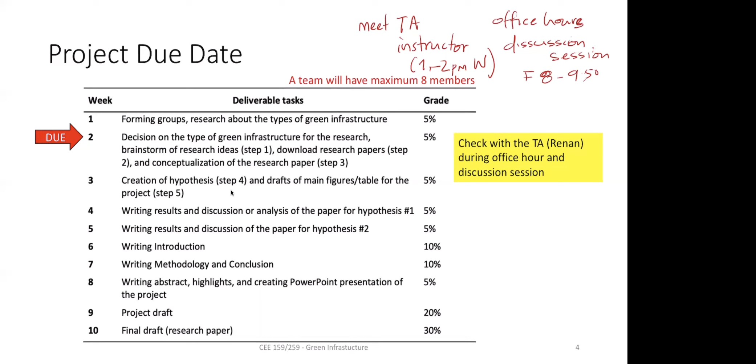So you can join as a group. Again, not all group members have to be there, as long as you have that coordination. You can record during that meeting so that you can also share with your group and go over it. Again, the scope of the project is very much anything you can do really.

So it's not us who will decide it. But if you are thinking of making it a web publication, then we'll help you early on what kind of project you should choose, because we have an idea about what is publishable and what is not. So we will be more involved in selecting the topic for you if it's going for publication.

As far as I know, the one group that initiated initially is already full. That doesn't mean that if you have interest, you cannot do it now. Just let me know, send me an email, because it's still early phase, you are discussing different projects. So by second week, we can form another group. But we just need a minimum few people to create that topic.

Again, the reason for class projects is it will give you real world experience of developing a project, writing a proposal for an agency. So you learn how to work as a team, because alone you have a different style, different people have different styles. You got to work with them together to complete your task. This is good experience. And most importantly, you learn how to write scientific, technical writing skills, and also how to present well. These are things you learn if you took class CE159/164 last quarter.

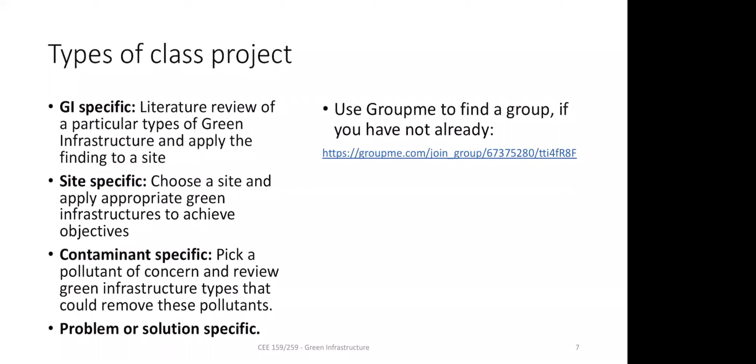You'll learn what those components do — for instance, components like plants, so whether you have plants or not, what kind of soil, what kind of filter media, how much spacing there should be between locations, how much grading or slope it should have — you'll learn at least the concept behind all of these.

Then you'll also learn the scope of the project, which you already covered. Most importantly, at the end you'll learn how to use the mass balance equation to figure out how much water you'll receive at a location, because you're going to treat stormwater — if you don't receive stormwater, you can't treat it. So you have to calculate how much stormwater you'll receive at the site when you design the system. You might also calculate how much pollutant you'll remove through simple reaction processes — these are again mass balance concepts.

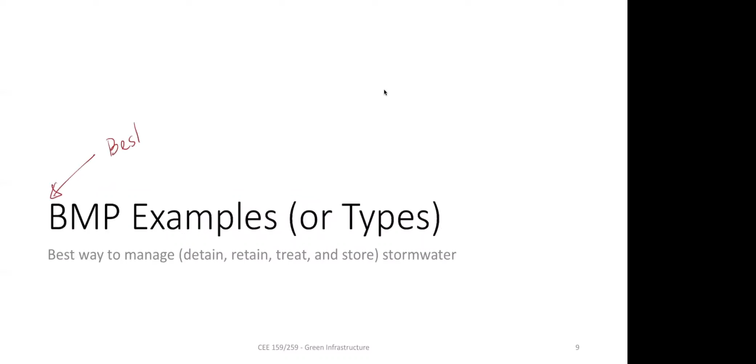The first thing is BMP. This BMP and green infrastructure are very similar concepts. BMP is used for many things, not necessarily just stormwater. BMP stands for best management practice.

Okay, so there is best management practice for how to prevent issues, right? BMP is for many things, it doesn't have to be just stormwater. But in stormwater areas, a lot of people use BMP and green infrastructure interchangeably. Let's say BMP means anything, it doesn't have to be green infrastructure. It could be something like not building in that area - that's the best management practice, you're not building anything. Green infrastructure is something in between. So green infrastructure is a small subset of the entire BMP.

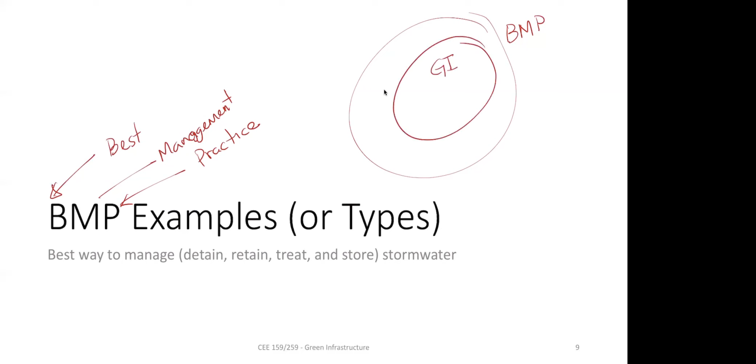That's a... sorry, I don't know why this closes. There's a message coming from somewhere, I don't know how to mute it. Okay, anyway, hope that person doesn't respond. Sorry about that.

I'm sorry, let me tell this person not to text me. There are texts coming everywhere even though my phone is off - it's a computer.

This is again on the green roof. UCLA is a beautiful campus and there are a lot of places you can see green infrastructures. It's unfortunate that we have to do this online right now. There are other things you can see that aren't part of UCLA but are worth noting - rain gardens, rainwater harvesting tanks, and other things like planter boxes and permeable pavements. Again, you should go to this website so you can see all of them.

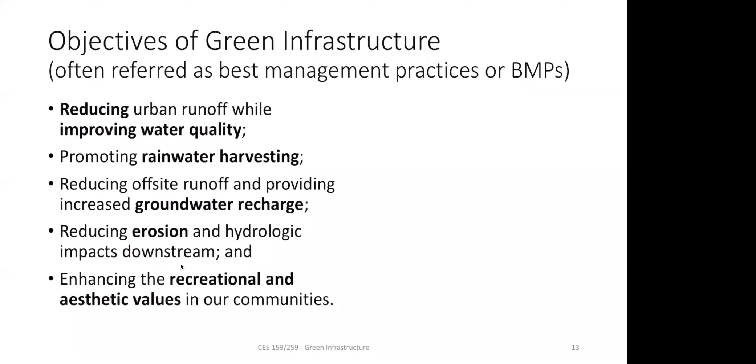One of the questions in the homework was, what's the objective of green infrastructures? There are multiple benefits. It reduces runoff by infiltrating more water, and because it has more infiltration, it increases groundwater recharge. Because it has less runoff, it decreases erosion - more runoff means more velocity, which increases erosion and has negative impacts on the downstream environment. It can also harvest stormwater or rainwater using devices like rainwater harvesting tanks. It also has multiple ecological benefits - not just that it looks like green space, but it helps birds and other microorganisms or biota survive. Those are part of ecosystems that are slowly having their diversity decrease in urban areas, and by putting in green infrastructure, we are helping those communities.

So there are many types of BMP. I'll go through them by function so you know how to use it and when to use it. There are green infrastructures designed as pre-treatment - they are not necessarily designed to treat the entire stormwater, but at least to remove some of the large particulates from the stormwater.

One very common type is the screen. Every time you drive or walk on a sidewalk, you might see on the roadside where stormwater or runoff gets into the drainage. Before that drainage, you'll see the screen. The reason for the screen is to prevent leaves from falling in so it doesn't clog. These are pretty big screens, so that's kind of a pre-treatment.

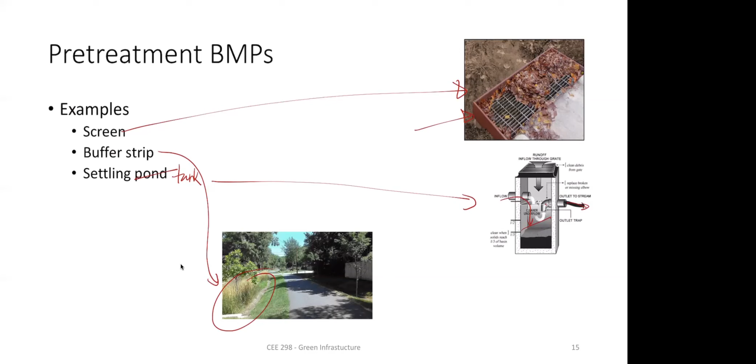So these are very typical pre-treatment strategies for first flush. First flush means the very first amount of runoff you get when it rains.

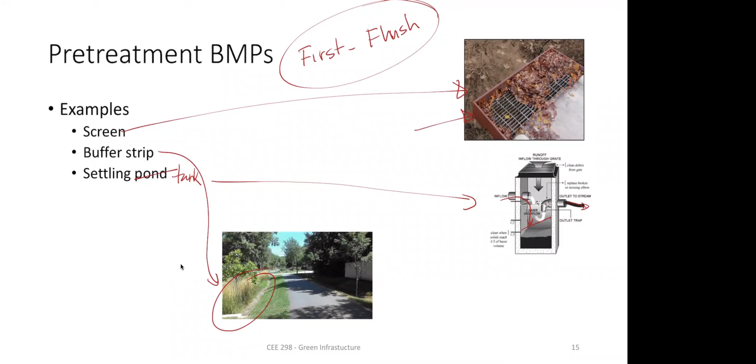Then there is a sedimentation BMP, where the main idea is to settle all the particulates. Here, mostly the big particulates and leaves will be removed. Very fine particulates you won't be able to remove here because they stay suspended, so it takes a little longer time - you need more time. For that to happen, you need a larger system like a detention or retention pond.

There is a difference - detention and retention sound so similar. Do you know the difference? Which one is retention, which one is detention? For instance, here, which one? What's the difference between them? It's hard to know, but let's guess. Which one is retention? Any guess?

Let me make a poll. I'm just going to put the same question - whether it's the left picture or right picture. So between these two, this is left, this is right. Tell me which one is the retention pond.

Make a guess. You really can't tell from the picture, but I'll tell you the difference to remember. Think of it this way: in high school, I was detained many times. So think about what detention means in high school - do they hold you all the time, or just for a set period? It's about time, how long you'll stay. Detention versus retention.

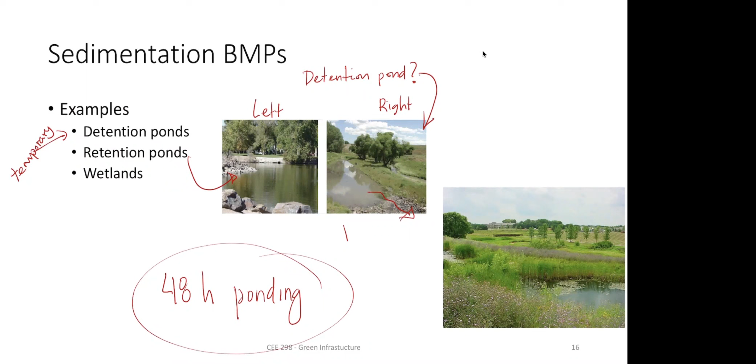But yes, you're right - if it's less than, let's say, 2 to 5 microns, it will not be removed unless it stays for a long time. By rule of thumb, anything less than 2 microns, which is clay particles, will not be removed. Anything silt-sized or bigger, like sand size, will be removed.

All right, so there is another type of BMP, which is capture and use. Capture means you capture the stormwater and then somehow harvest it for a certain purpose. Here you can see there are many plants. What they do is take the building's water - if you have gray water from the building, where you wash hands, instead of sending that water back to the wastewater treatment plant, they put it in here. That way they don't have to irrigate this land.

So what it does is reduce the cost of irrigation because you're reusing the water. As it percolates through the system, it also filters the pollutants, which aren't a lot. Then they put that water in an underground cistern or capture device, and reuse it by filtering using UV disinfection, because the only thing you care about is pathogens - there isn't much chemical contamination to begin with. So they filter out particulates, store it, use UV disinfection to remove pathogens, and then reuse it. It's pretty clear.

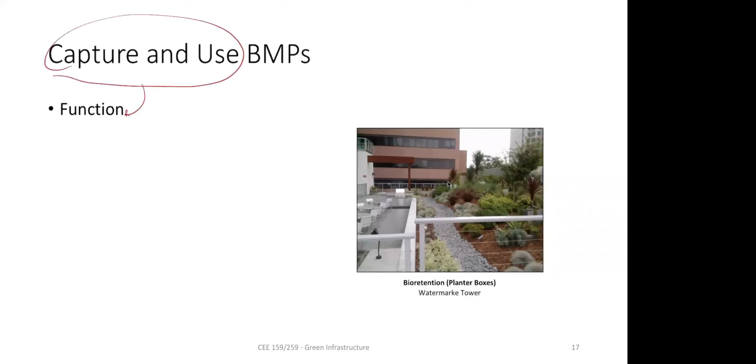So it's a circular process here. The capture and use BMP's function is to capture stormwater and use it - these are the functions: it filters, then stores, disinfects, reuses, then diverts again. That way you reduce your water bills and also have these nice places. Obviously not all water is recovered, but at least some is being reused.

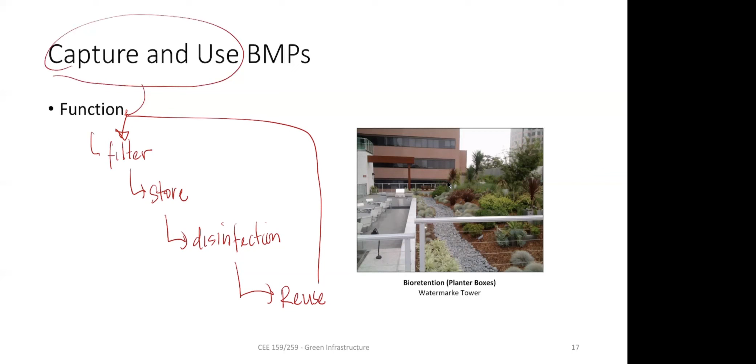There are other capture and use devices where you don't have any treatments, called underground cisterns, which are basically big pipes that you store water underneath. You just dump it all in the pipe.

These are usually designed below a parking lot, a soccer field, or any kind of big field. If you go to Santa Monica Pier, that's a big area designed like this, and many other places already have this in place. The only function of this is high volume storage.

These are pretty expensive to build because they have a large footprint, so you can only build them where you have lots of space and expect to receive a lot of stormwater. If you don't receive much stormwater, you're developing infrastructure without enough water to compensate for the cost. These are effective for dry areas because you receive a lot of rainfall quickly, store it, and use it for a long time.

By far the most common and more effective is filtration-based BMP. Filtration means what it sounds like: you have a filter layer, mostly soil, a mix of sand and something else. It could be soil, compost, mulch, wood chips, or gravel. As water passes through this system, it removes some particulates. There are a lot of things that classify as filtration BMP.

Then there are infiltration BMPs. The difference between filtration and infiltration is whether it goes to storm drainage or groundwater. Infiltration means it percolates through soil and gets into groundwater, and there could also be a combination of both. So next time you hear infiltration, it means it's going to ground; filtration means it's going through a filter layer and then to storage somewhere else.

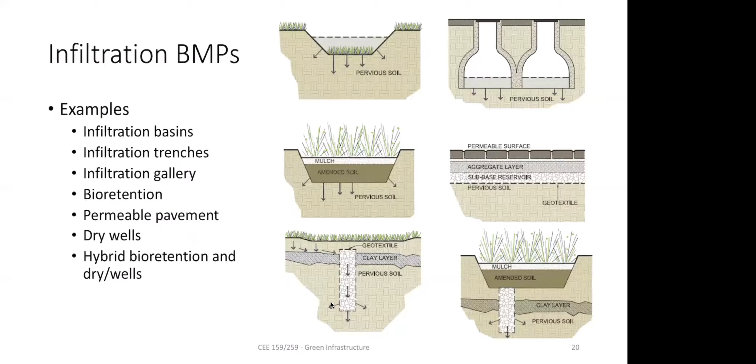Here's an example given: water infiltrates into the ground after treatment. Filtration means it's diverted to a pipe.

Again, this could be a combination of both. For instance, in this picture, it's both infiltration and filtration because the collection pipes are perforated, so they could drain some of the water. When there's a high amount of flow, you get it in here, but the rest infiltrates into the ground. So it's a combination of both.

We won't get into detailed design, but just know you have a source where water is coming in, then some kind of filter media—mulch, amended soil, gravel—at different locations, like why gravel is at the bottom. You'll learn those details later; just know these are the functions, and these are different designs.

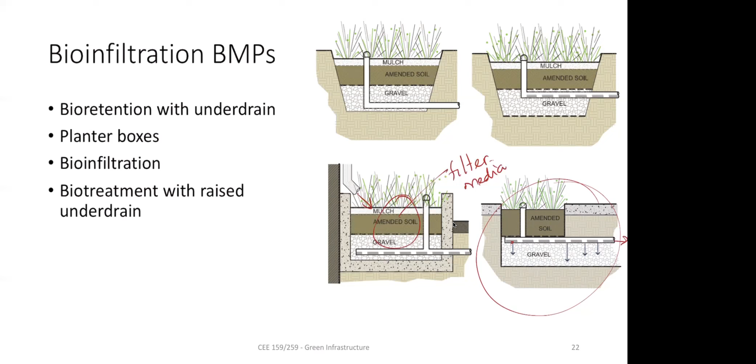As usual, if I ask a quiz question between bioinfiltration and biofiltration, which one has higher groundwater recharge—obviously infiltration has groundwater recharge. Filtration doesn't, unless there's a hole in the pipes. Usually infiltration helps groundwater recharge, while filtration just stores water somewhere else to reuse or discharge to surface water. That's the key difference.

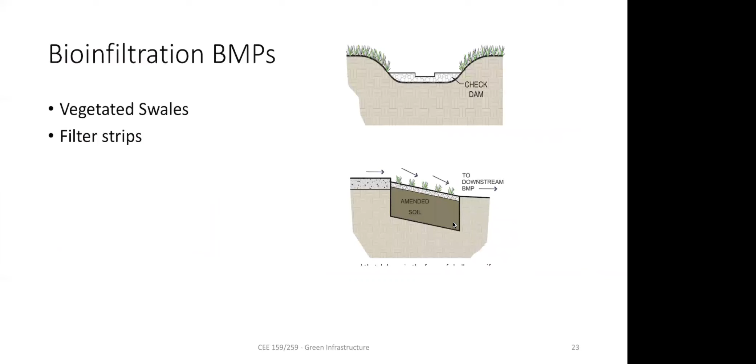You might also see vegetated swales or filter strips. A swale is a depressed area, not too big a hole, so that stormwater gets into that area and slowly moves through it. The vegetation layer on the bank or side filters large particles and large sediments. Stormwater moves sideways, not down—it's basically a natural channel.

A filter strip, on the other hand, is water coming from a high elevated surface to a low elevated surface. It has to pass through a planted layer so that it can remove everything.

All right, any questions? So now you've learned most of the different types of BMPs or green infrastructures. Now we'll get to the different functions of it. But any questions?

Professor, so does infiltration remove the runoff from surface water? So would it be retention or detention?

I think it's a good point. It depends where it is removed, how long it's stored. But as I said, it's used interchangeably. The only place it matters is a pond. Every other place, things don't stay longer. By default you have to have maximum 48 hours ponding time for mosquito control, so you cannot store water more than 48 hours. That means on the surface, it's already by default detention, right?

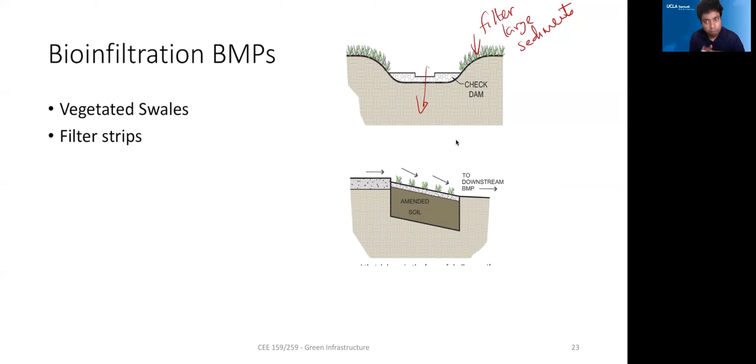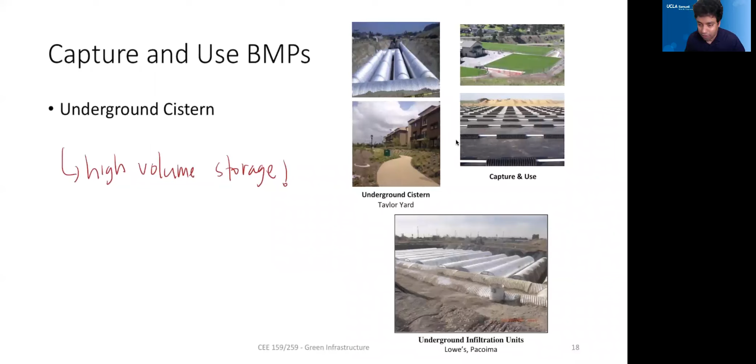It's just how you say it. It's really not a big deal if you say it a different way, but you should know the reason behind it.

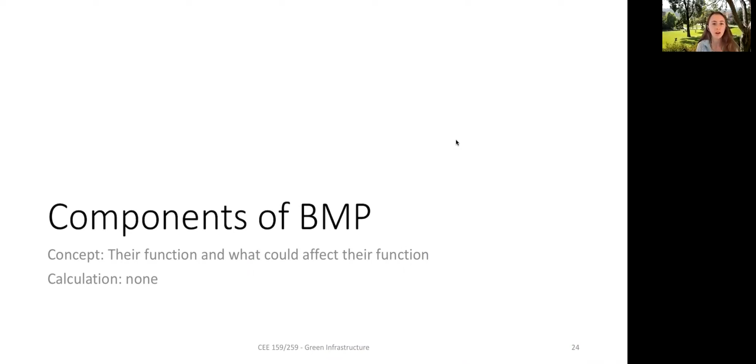For the water that ends up percolating through permeable asphalt, does it sometimes pick up more pollutants as it filters through that type of concrete, or does it end up treating itself over time?

Good point. A lot of times filters are not necessarily clean, they have pollutants too. For asphalt, it depends what pollutants are there. Most asphalt doesn't have much. What they release is silica, which is not a pollutant, like sand. Sometimes if it's cementitious, they increase the pH, and also temperature because they are hot, warm. But as far as releasing pollutants like heavy metals, they are not as much as what is already in the stormwater.

Most of the time, permeable pavements or those kinds of things are designed to remove particulates. They are not designed to remove dissolved pollutants, so you're really not thinking of those. And water moves so fast through that system that it doesn't have enough time to leach out. You'll learn all the details once we get to individual type design, this is just an overview, not going into details.

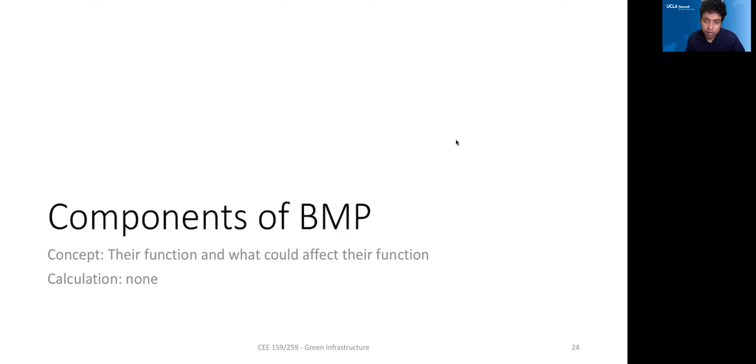All right, so let's think of the components of a BMP, or why different designs are necessary. On the left side I wrote different functions that green infrastructures are designed to do, and the design component will be what helps achieve those functions.

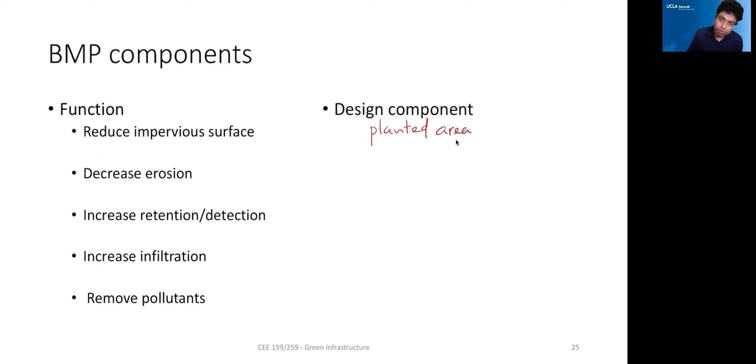Let's start with the first one, reduce impervious surface. What are the things you need to do to reduce impervious surface? The very first design component is to remove it, and replace it with bare soil with a planted area. If you just take the cement out and put grass, that's already a BMP, because it doesn't really block all the runoff. So the design component is all about...

Infiltration. It is allowed to, it's designed to increase infiltration.

All right, decrease erosion. How do you decrease erosion? Erosion is related to how it occurs, because you have water moving at very high velocity. Water moving slowly does erode, but not that much. So the energy of water is important. How do you slow down the energy of water? Any suggestions? These are all very logical processes, so it's nice to make these kinds of wild guesses.

Maybe like a bioswale? Yeah, exactly, this is another thing. Every retention pond by default slows down the flow rate, or every green infrastructure, because it has roughness - because you are removing this impervious surface, by default the energy is now slowed down because you have more resistance. So anywhere you can, this means velocity decreases. The only way you can do it is if you increase the resistance.

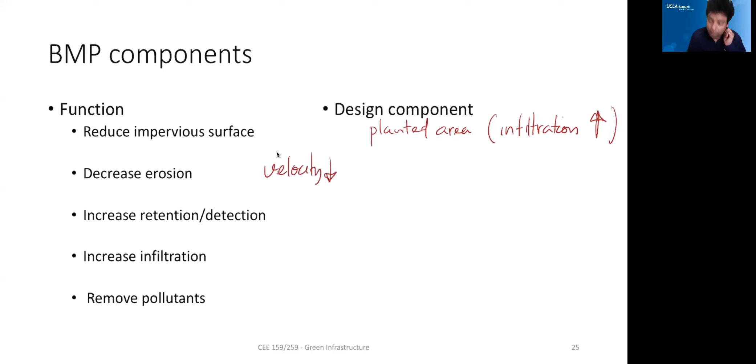And how do you increase resistance? If you have more plants or holes, think of any kind of rocks - put some rocks in the way so it just slows down, or any kind of system. So every green infrastructure is designed to slow down velocity, and also volume of water. If you have more infiltration, by default it has less volume, that means already less velocity.

Increase retention or detention - so what's the function? If you want to retain more water, what should you do?

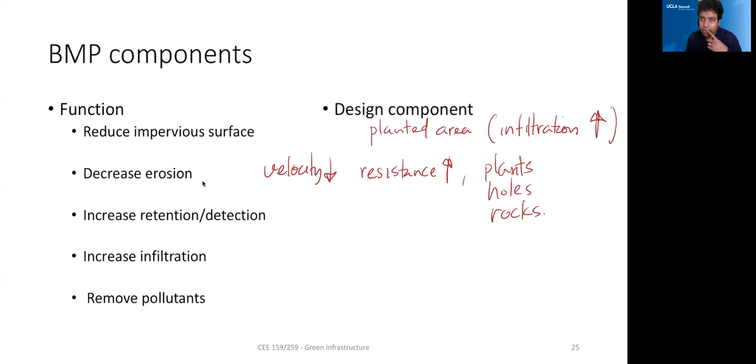Any guess? Let's say if you want to hold more beer, and you want to go to a bar and get as much beer as possible in one time, what do you do? Can you increase the porosity? Exactly, so you basically get a bigger container, right?

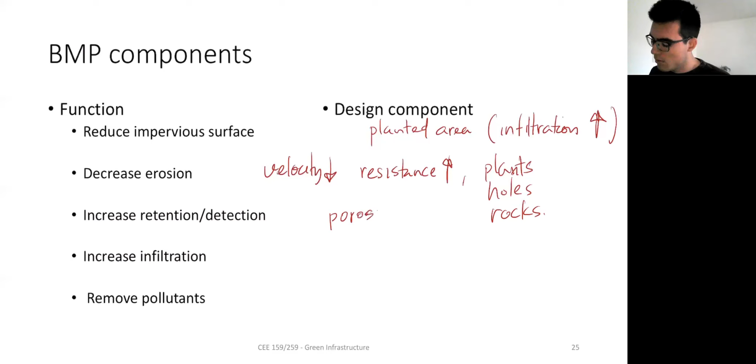So bigger space - if it is filtration media, you can increase the porosity. If it is not porosity, you can increase the depth. If it's a retention pond, you just increase the size. So size increase - means either area or depth or all that.

Increase infiltration. How do you increase infiltration? Think of if I pour water - infiltration means how quickly it percolates through soil. If you go to the beach and pour Coca-Cola or water on beach sand, it disappears very quickly, right? But if you do the same thing on a parking lot, it doesn't disappear. If you do it on your garden, it takes some time.

So what's the difference between those three? What do you call that? It's the permeability or the hydraulic conductivity. Exactly, you'd want to look for a type of medium - you do change the permeability. And permeability, hydraulic conductivity, that's based on Darcy's law.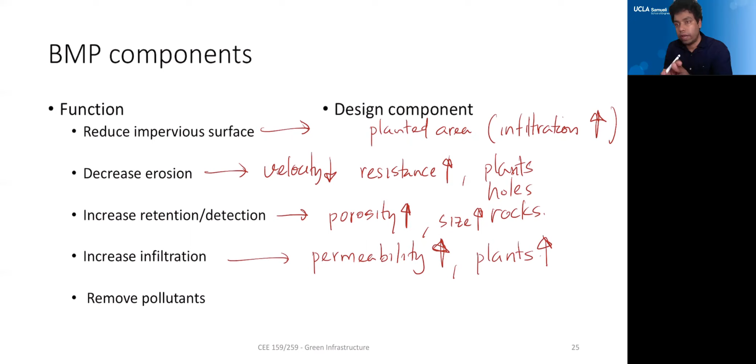A lot of times, something unique is plants. If you have more plants, they also increase infiltration. The idea is that plants have roots, and those roots go through soil, creating channels because the root will die, and that creates permeable pore space. Many grasses die, decompose, and lose their roots - that's how they make the soil breathable, and that's how it also increases microbial diversity. So having more plants also helps with permeability.

Remove pollutants - how do we design systems that can remove pollutants? It depends on what pollutants. For sediments, you already learned you have to filter it or do sedimentation. So that's if it's particulate - sedimentation or filtration. If it's big plants or leaves and such, you can filter it out by just putting a strain or plant. What about dissolved pollutants? What's the way to remove dissolved pollutants?

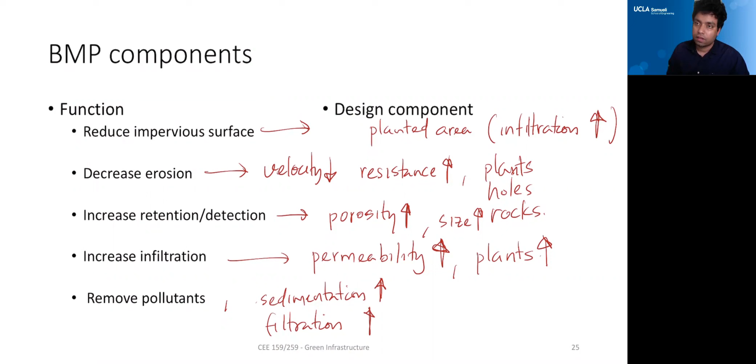Any suggestions? Maybe some chemical reagents. Yeah, so dissolved pollutants can be removed many different ways. One is chemical reactions - reagents you can add. What other way?

Think of, I give you a dye - dye means the color, and you want to remove color from your water. What do you do? Let's say you have dye on your floor, somebody spilled it - what do you do to remove that? Obviously reagent chemical is one thing, but what's the basic thing you do? Put water - yes, and imagine if somebody spilled something on your dress.

What's the instant reaction? What do you look for? Bleach? Oh, you wouldn't put bleach on your surface because you'll destroy it. Think of if I spill some food here while eating - I do it a lot of times. You just wipe it or rinse it with water, or wipe it with something, right? What is that? Some kind of cloth - absorb it. Yeah, like cloth or paper towel, right?

So what about paper towel - why does paper towel remove things easily? Why not anything else? Why not just take this one and do it? It doesn't do anything, right? So what's the reason behind it? What's special about that paper towel? I'm looking for a word. It's absorbent - yeah, basically it absorbs, right?

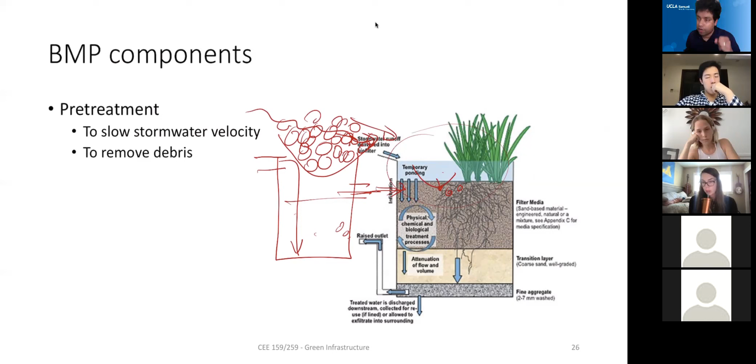So what happens is, as I said, stormwater gets in here, it fills the system, then all the particulates are removed, and then it goes into here. But this cannot slow down the velocity once it's full, because once it's full, things will move on top of it. This is more of a sediment trap. But rocks are the real velocity breaker.

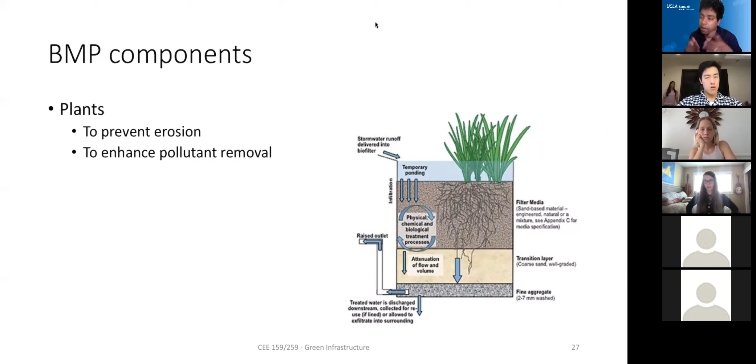And then you have plants. Plants themselves have the ability to prevent erosion because the root systems bind the soil. So if you have lots of plants, it kind of makes them stable. Plants also remove pollutants, so learn how it is removing pollutants. Plants are an integral part of many designs because they help increase removal of nutrients, since they need nutrients to grow. They remove heavy metals by absorption on the root. Some of the pollutants can be taken up by plants. Plants also help create microorganisms which can degrade pollutants. So they have their own functions.

The next thing is the retention pond. So what's the reason for a retention pond? This is our ponding area. It already tells you what's the reason behind it. The idea is that if you have more volume of stormwater captured, you treat more water. So you want to have that depression, that hole, a little bit larger—not too large that people will fall into it and hurt themselves. But the idea is to capture more stormwater so that it can be percolated into the ground.

So it increases the treatment volume. And another thing you learned from CEE159 or other courses, if you have higher volume, it increases the head. That means the pressure of water inside the pore is much higher if you have a larger volume of water. So that means the infiltration will be much higher. It's the same thing as a coffee tank or some kind of tank where you collect water or drinks. When you open the bottom valve, things come out very fast when you have a higher volume of water.

So that's the exact same thing—if you have more water ponding, it increases infiltration. That means it will increase the groundwater recharge. So if you want to increase the recharge function, you should be able to have some kind of ponding. It also removes sediments because it has filtration ability by having those plants.

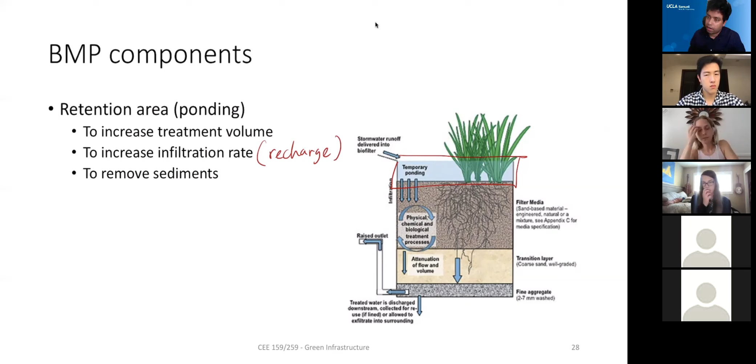Then the final component is the filter media. This is the main function of this system, because it removes pollutants, dissolved pollutants, which is otherwise not possible to remove. And most of the time, they are designed to remove pollutants.

So the filter media could be mixed up sand. The reason we put sand is because you want the water to move fast enough so that you can capture more and more water. So the main component is sand, so that it increases infiltration.

But sand itself doesn't have much capacity to remove pollutants. So it's usually mixed with other amendments like mulch or compost, activated carbon, or biochar, zeolite. There are many adsorbents - think of any kind of natural materials you can add. These will adsorb pollutants, and they also provide nutrients for the plants above so that the plants can help grow. So they have other functions as well.

The last one, as you see over here, this is the storage layer. The function of the storage layer is that it can capture enough water so that it can be used later. Because the filtration layer usually is not high porosity - because if you have very high porosity, things will move so quickly that it will not remove pollutants. Whereas in a transitional layer or storage layer, you want the porosity to be high so that you can store more water. And in this particular case, storage layer, you see the raised outlet.

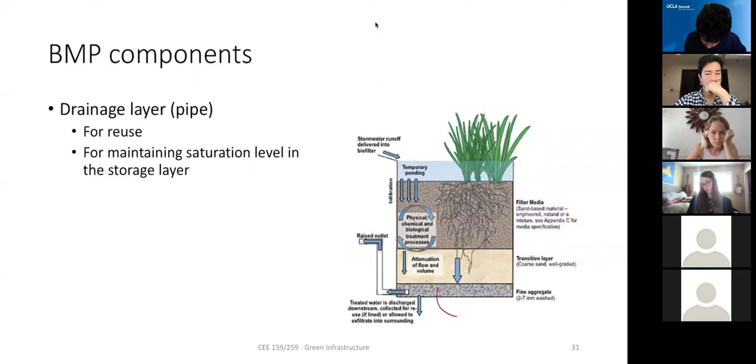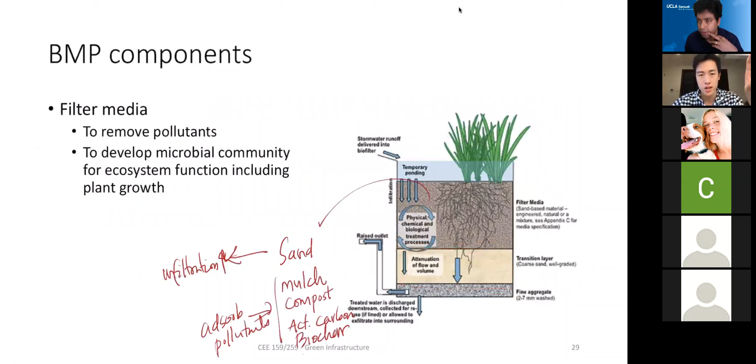Professor Mohanty? Yeah. I just wanted to confirm - so basically all the 10 slides we went through just now, they're all talking about different components within the same bioinfiltration system, right? Yes, because this is the most common one, so that's why I used this one as an example. Because you can remove some components and it will still work - you just need to know what you're removing.

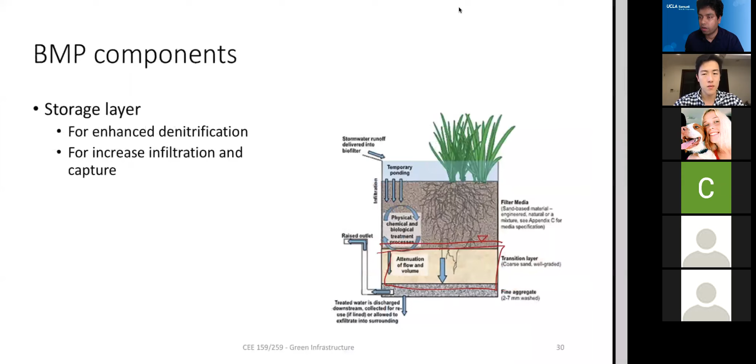Right, so before the break, we learned about different design aspects of green infrastructure, just an overview. Now we start going to use the concept of mass balance to solve how much stormwater you have in a system, how much you receive at a system.

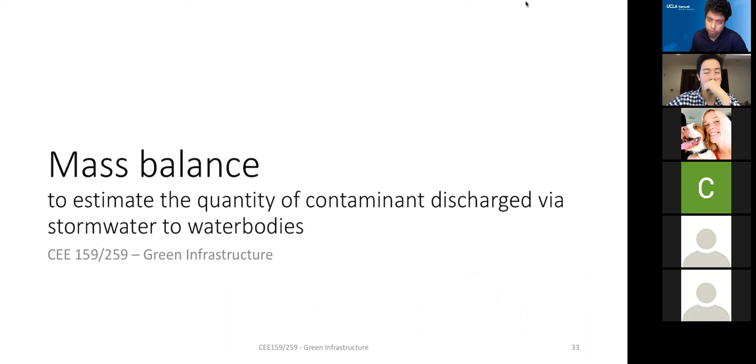How much pollutants you can remove from a system based on the design. This is very similar and the same thing as you learn in CEE153. The only difference is you are just applying for stormwater. So I suggest you should go back and read those. If you haven't taken this class, watch those videos. Those links are given on the slides. But I'm just going to go through the things very quickly. So these are the slides given already, just check that on.

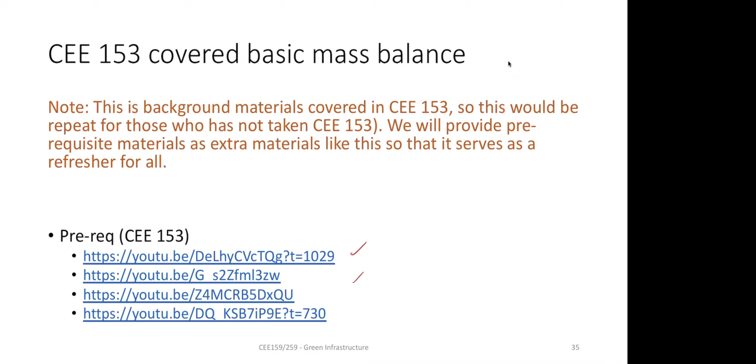This is CEE153. But everything from this now on, 35 to onward, is already part of a recording that I already uploaded. The reason is I know these are examples, just repetition from CEE153. So it was pre-recorded, so you can just watch them later.

But I'm just going to explain very quickly what the mass balance concept is, so that we can solve at least one example here in the class. Then we can break into rooms if you want to stick around to solve more problems. But those are already solved again.

So let's see what conservation of mass means. It means that if you receive, there are two types of mass we are looking for here: mass of pollutants and mass of water. These are the things coming into the system. Either of them is conserved. What that means is everything that's coming in has to be what's leaving the system plus what is being reacted or stored in the system. So that's why mass balance is all about what's everything, where everything goes.

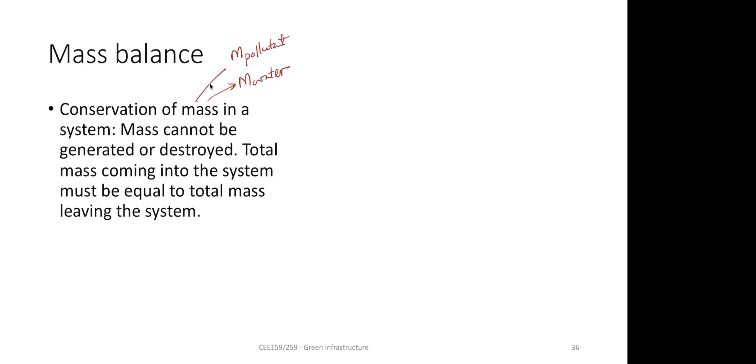So let's say this is green infrastructure, the system, or we can call it a system. Stormwater usually coming in, so let's say this is stormwater coming in. Then you have some kind of treatments or storage. Then you also have it leaving the system, outflow.

So usually, if it is pollutants, you know the concentration because you don't really know the mass, you don't know how much is being added. You just take a little bit, grab samples, and you know the concentration of pollutants. So you can call this C in. And then you also know the flow rate, how much amount of water. This is basically water flow. This is pollutants.

And some of them might be stored. Let's say this is the volume. So you know the volume, so you know how much is being stored. Then you also know what's the flow rate out, so Q in, this is Q out. And you might also know what is C out.

Usually you are asked to solve for C out, because that's one thing your TMDL, or total maximum daily load, depends on, that C out and Q out. So you don't want to add too much pollutant discharge into the system. That's why you're controlling C out using green infrastructure. In fact, sometimes you are controlling Q out. You don't want to have a very high runoff, so that no flooding occurs. So basically these two are your output, or those things you're solving for.

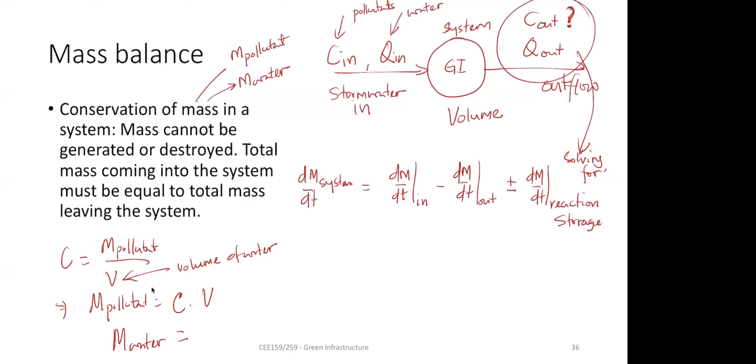If you want to find the mass of water, how do you change it to flow rate? Well, mass over volume is density of water, which is basically constant, right? So unless temperature changes, density doesn't change. So mass of water equals mass divided by volume is density, that means density times volume is mass.

So this is mass of water. If you take the derivative of this, d(mass of water) divided by dt, it will be density times dV by dt. Density of water doesn't change much, it changes with temperature but temperature doesn't vary so much, so density is a constant, it comes out of the derivative. So it becomes dV by dt, meaning the rate of volume change over time is basically flow rate. So density times Q.

So if you want to use these equations, the above equation can be simplified. Again, check the video, I don't want to go describe it. Basically, this will become mass equal to, if you do for concentration, it will be concentration times volume. So concentration, if it is constant, the volume is constant in a system, because any system, if it's a pond or something, the volume is constant. So the volume will go outside here.

This will be dc by dt. So that means anytime you can predict the change in concentration in the system if you know the volume of the system, which is normally given because you design it. And then here, how much mass of pollutant is coming in, the way mass of pollutant comes in is by flow rate. So usually this will be dm by dt is basically concentration times volume by dt, right?

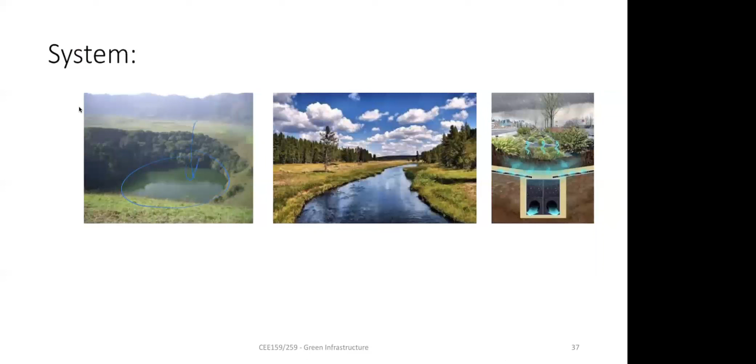I'll go through all of them. And again, just to show that the system could mean a detention pond or lake, you have a boundary, things are coming in here or here, that's how you can account for it. For instance, here, you can make the system boundary like this. Things are coming in, things are going out, and that way you can calculate that.

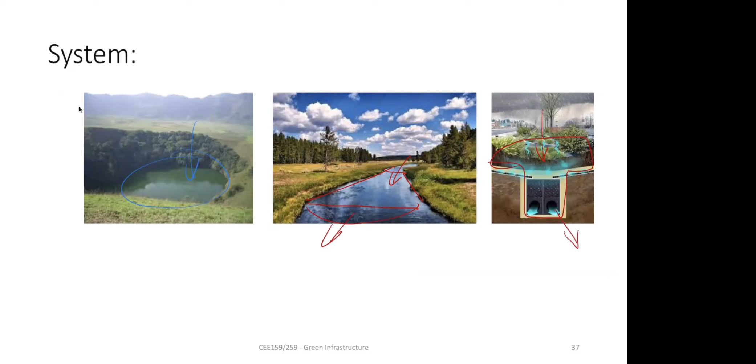Over here, this is a bioretention system. You can say that if the boundary is this system boundary, things are coming in here, then things are going out here. So you just have to identify what is in, what is out. Again, check CEE153 so you know these details. I already solved this one, I just wrote the entire equation here. What does that mass balance equation mean? A lot of times you can break it down to different systems.

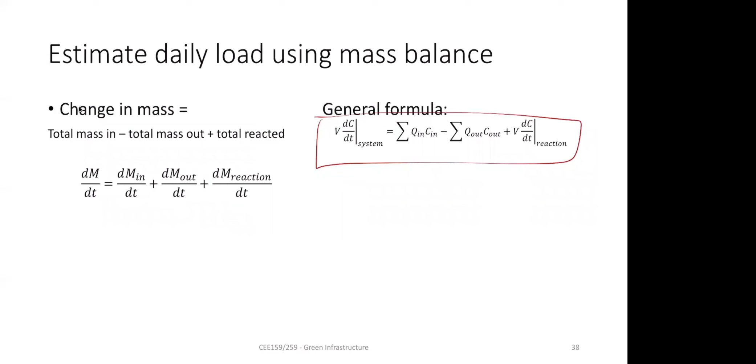So number one is steady state. Steady state means the system concentration doesn't change with time. What happens is that whatever is coming in is also reacted, so there is always equilibrium. That means the change in concentration because of reaction is the same thing as what is being delivered. So net change is always zero. So steady state means change in concentration of the system equals zero, meaning concentration in the system is constant.

Okay, so this is just a steady state for concentration pollutant. But if you say steady state for water, that means Q in equals Q out. So that means there is no change in volume of the system, because volume is the mass of a substance. So sum of all flow rate in equals sum of all flow out - that's the steady state equation for water.

And for contaminant, this is the equation for contaminant. Okay, this is again a repeat of what you already know, from 153. I'm just giving you an overview so that we can solve it. So these are examples, this is how we can solve it.

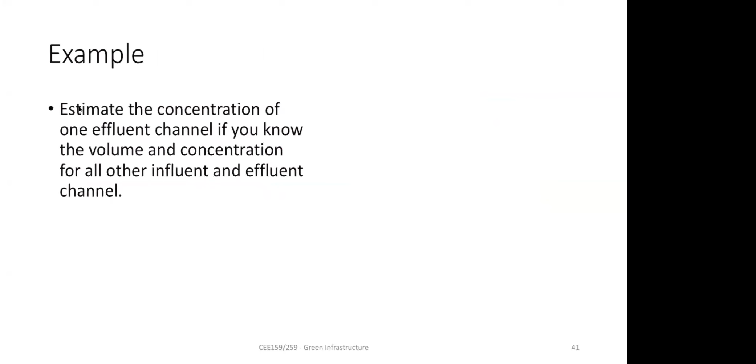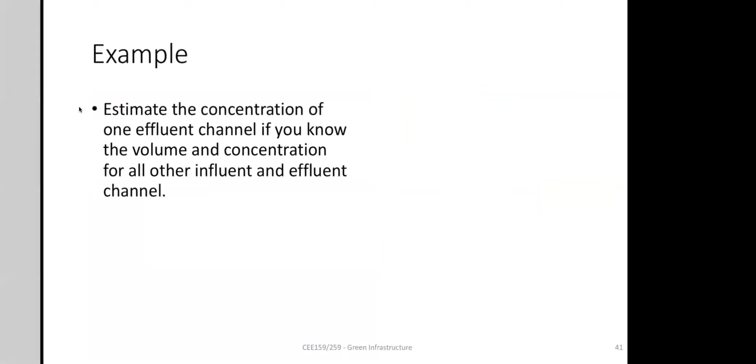So these are different examples we'll solve, but I just want to make sure we solve one question - everything else is already pre-recorded. Any questions until now? We'll randomly solve one question, okay, let's see. Again, these are all solved in the recording, so I don't want to redo it here. Let's solve one of these that looks like a difficult question, or at least one of them. I don't know, I'll just pick one - one with a reaction, one without reactions.

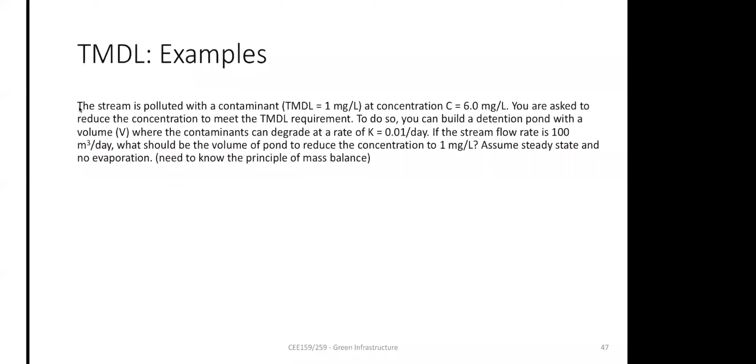So let's see, there's one with no reaction, this one has a reaction, this one doesn't have a reaction. So let's use this one.

Okay, so it says a storm sewer is carrying snow melt containing 1.2 gram per liter of sodium chloride into a small stream. So there's a sewer coming in here and mixing with a stream, and the concentrations are basically given. The concentration coming in is 1.2 gram, the flow rate of this is 2,000 liter per minute. The stream flow rate and concentration is also given.

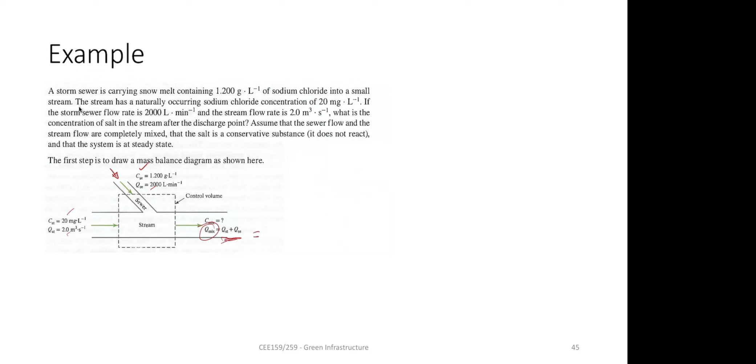And I ask - since it's steady state, there is no change in volume, we can always assume sum of flow rate coming in equals flow out. So the flow rate out should be what is coming in added together - that will be 2000 liter per minute plus this, which is 2 meter cube per second.

So this is liter per minute. Of course, you could have changed everything to meter cube per second if you wanted less conversion. So this will be... 122,000 liter per minute. Okay, so you solve for the flow out.

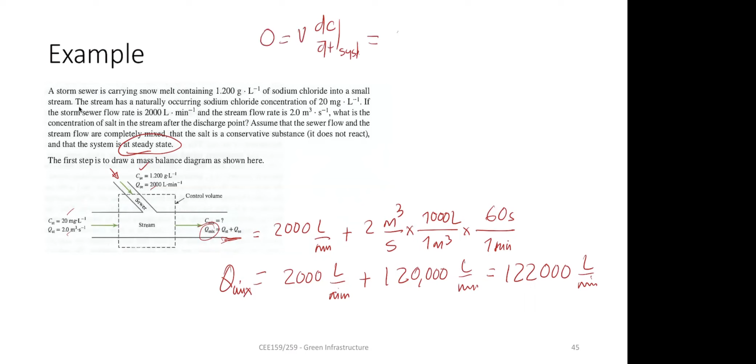Now you have to solve for what is C mix. So again, for mass balance, you can say - if you start with that same equation, it says somewhere it is steady state. Let's look for this one, somewhere it says steady state. Okay, so steady state means dC by dt in the system equals 0. So that would be C in, Q in, C out, Q out, plus a reaction term. And it says it doesn't react.

So that means the reaction term is 0, so all you have to do is everything coming in has to equal everything going out. This is the summation - this is everything, meaning everything coming in, not just one. So what is coming in here is C_se times Q_se, that's one channel.

This is one, and this is the second input, which is the stream - C_ST times Q_ST, minus what is leaving the system, which is Q mix times C mix. So you are solving for C mix, which means C mix equals C_se Q_se plus C_ST Q_ST, divided by Q mix.

Everything is given; the only thing you have to change is the unit for flow rate to be the same. Everything else is given, but one is gram per liter, another is milligram per liter, so you have to change to the same unit. For instance, if you change to milligram per liter, 1.2 gram per liter, and 1 gram is 1000 milligram, so that becomes 1200 milligram per liter. Now every unit is the same, and you can solve for it. So this is one example.

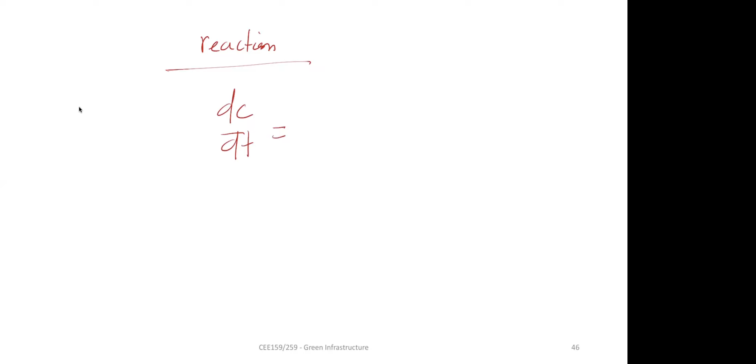But what if there are reactions? If we think about what the reaction means, it means that something is being removed or reacted. So the change in concentration because of reaction depends on reaction rate. If the rate is high, it will decrease very fast. So usually the equation for reaction can be described by a rate constant, called the rate constant.

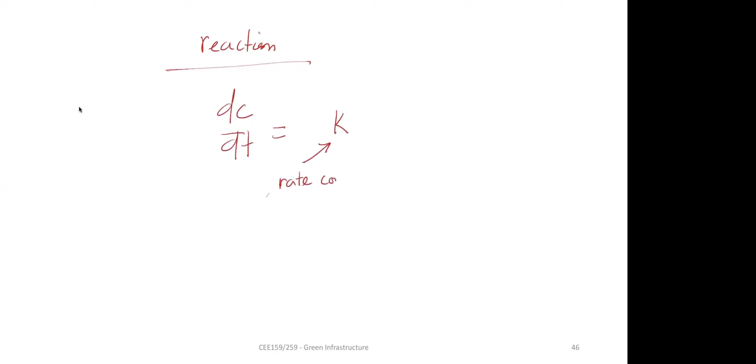And then it's C to the power n. This power n is the order of reaction.

The concentration of pollutant changes with time, or decreases with time. As time increases, concentration decreases. They are in opposite directions, so you have to put a negative sign here to balance that. This negative sign means the concentration decreases with time. If it is created instead, then it's a positive sign.

For first order reaction, which is most of the cases in any time you think of, very rarely will you have more than first order reactions. Sometimes you may have zero order, but that's also rare - we'll cover that too. But let's assume everything is first order reactions, so first order reaction means n equal to 1.

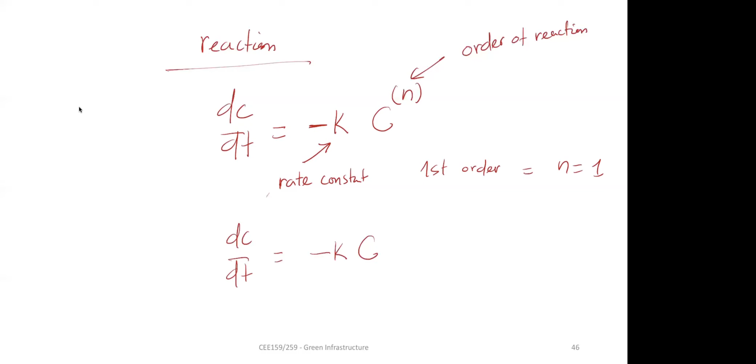What this means is that the change in concentration in a system depends on the species concentration. If that's the case, you can substitute this value in the reaction term. If you have a reaction term here, basically this is volume. If it is first order reaction, this will be Kc with a negative sign - that's for first order - and then you can solve for C.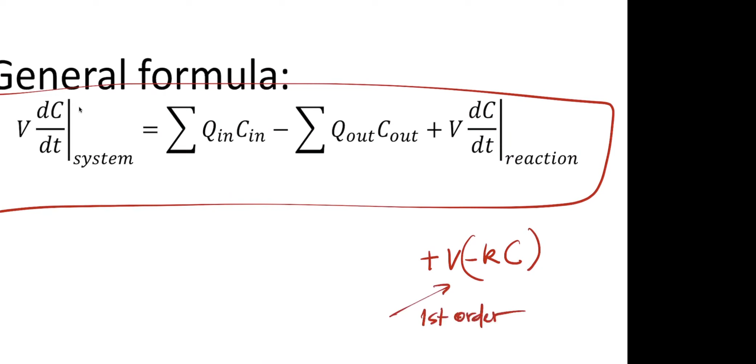So now the question is, what does that C mean? One assumption is that when there is a reaction, what is reacted in the system, the resultant reaction concentration is what comes out of the system. So for reaction, a lot of times you can assume a system like this: coming in, C out, with a volume where it's being reacted, and this is C reaction, inside is C. Because there is no reaction taking place outside the system, after reaction whatever the concentration, it remains the same. So a lot of times you can assume C equals C out, because once it leaves the system, it doesn't react anymore.

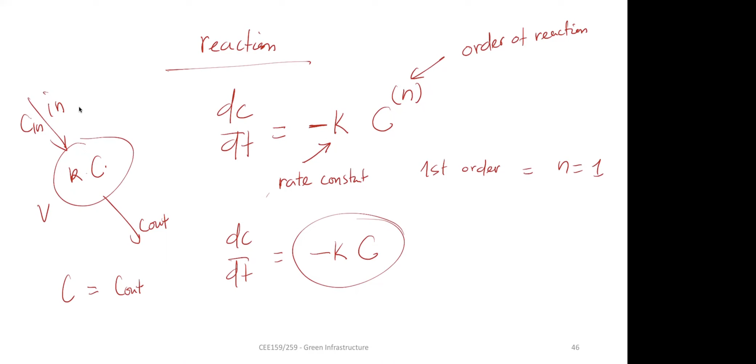So if you put those two assumptions together, you can substitute K C out in the equation and solve for C out. That's exactly what happens here, so I'm going to solve it. Again, these are all for the same equation. I don't know whether we need to solve any of them, but let's solve this one.

This is similar to the other question. You can check everything else in the example recorded video - these are all solved before, so you can watch them, but I'll just go through it quickly here. A well-mixed sewage lagoon is receiving 430 meter cube per day of untreated sewage. The lagoon has a surface area of 10 hectares and depth of 1 meter, so basically that tells you the size. If it gives the depth, it's a rectangle, and then you know the volume - so the volume of the reactor is given, which is 10 hectare times area times depth.

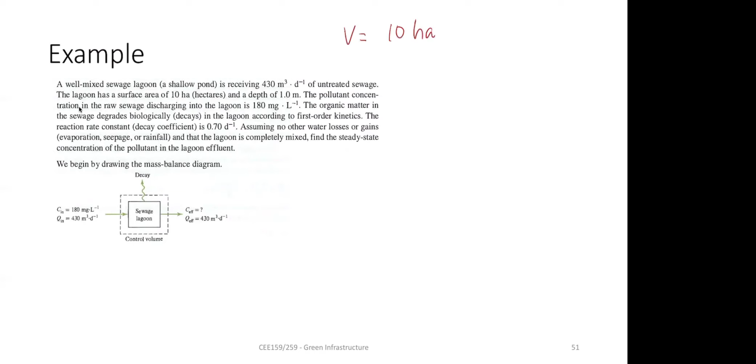So this is area 10 hectare and the depth is 1 meter. Again, you have to change everything to meter cube, so look for what 10 hectare means per square meter, and you can change it to meter cube. And if you know meter cube, you can also change it to liter, because 1000 liter is 1 meter cube. So basically this gives you the volume of the reactor.

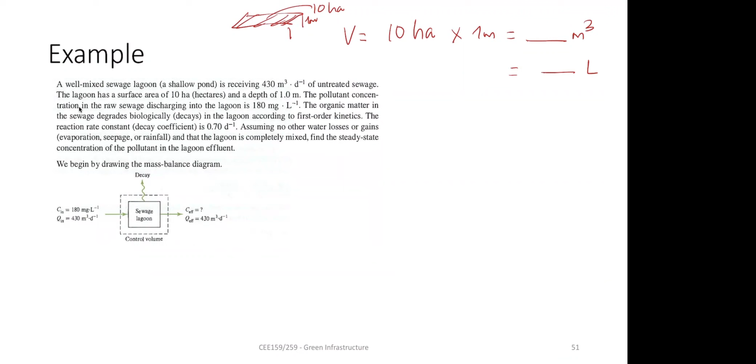A pollutant concentration in the raw sewage discharged into the lagoon is 180 milligram per liter - that's given, the concentration coming in. The organic matter in sewage degrades biologically, or decays, meaning it decreases with time in the lagoon, according to first order kinetics. Again, all you are saying is dC by dt equals minus kC.

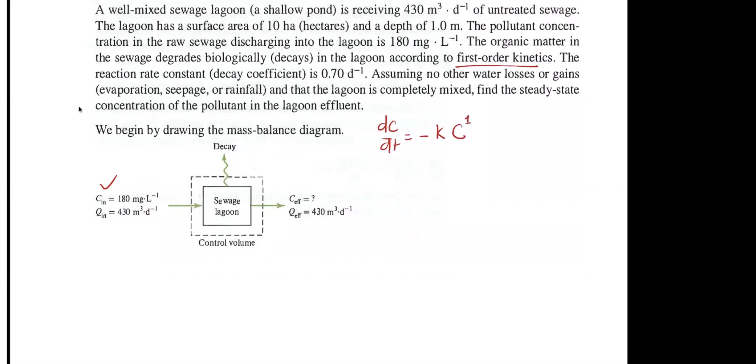This is the first order reaction where the exponent is 1, and the rate constant, the k value, is given here as 0.7 per day. That's the unit of first order reactions, or the rate constant, because concentration cancels out. If you see in these equations, this is concentration over time, this is concentration, so both sides concentration units cancel out, so it will be 1 over time.

Assuming no other water loss or gain, that the lagoon is completely mixed, find the steady state concentration. Again it says steady state—what that means in these reactions is you can assume that dC by dt in the system equals 0 on the left hand side. That means it's a steady state.

Then you have to solve the mass balance diagram. Okay, so let's solve this one. If you write the equation, the mass balance equation again.

V dC by dt system, it will be Q in C in, Q out C out—I'm just writing that one first, okay? Then V dC by dt, the reaction, dC by dt reaction. So because it's a steady state, this becomes 0.

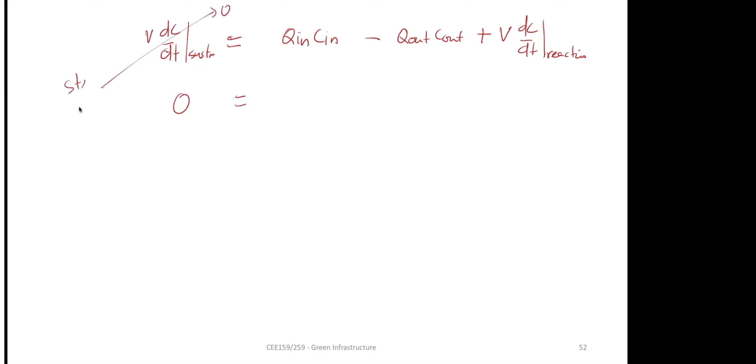So Q in C in, that's basically given to you—Q in is 430. Okay, let's first write everything: Q in, C in. Again, there is no change in volume, that means whatever is coming in has to leave the system, so what is going out is the same thing. So you can write this as Q, as opposed to Q in and Q out, because they are all the same. So Q, then you have C out.

Then the reaction is basically a first order reaction, so you write KC—that's the first order reaction, dC by dt is minus KC. Again, one of the assumptions is, as I said, whatever reaction happens at the end of the reaction is what is leaving the system. That means C reacted, or what is after the reaction, is the same as C out.

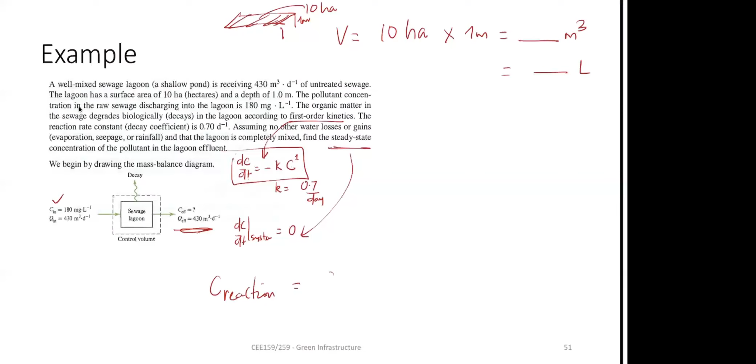So if you write this one and balance it out, this will be QC in minus QC out, equal to C—that's the assumption—minus VKC equal to 0. So that means concentration, if you set it to 0: QC in, if you move terms, Q plus VK.

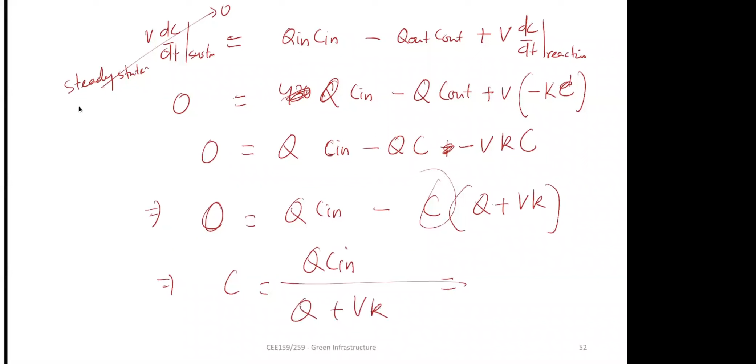I'm just rearranging because you are solving for what the concentration is. So if you rearrange again, it's QC in divided by Q plus VK. If you divide Q in both sides, up and down, it will be C in over 1 plus volume over Q times K.

Everything else is given—concentration in is given, volume is given, flow rate is given, K is given. Just plug in the values, make sure the units cancel out, that way you get the concentration, in whatever units C in is given.

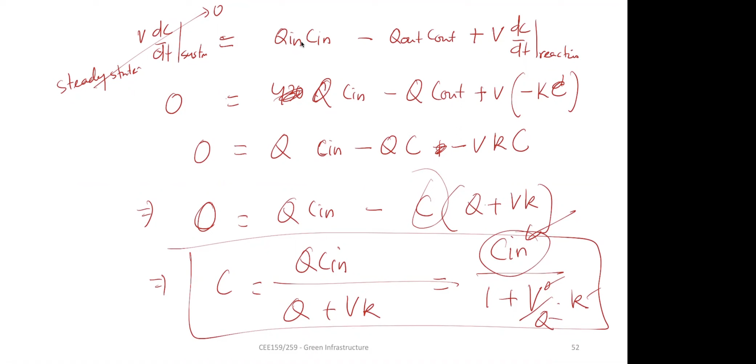Again, as I said, if you have not taken mass balance, you just need more time, so the next homework will have a lot of examples like that. I already solved multiple different types of examples and uploaded them on the class website, so you should watch them. First try to do one by yourself if you already have some concept of mass balance. If you don't, watch the CEE159 video and then try to solve this problem—the examples are also the same in CEE159 as here. So this is all you need to know in terms of equations, how to solve how much pollutants can enter and leave the system. There are some complexities, but we'll go through that whenever there is an example.

Again, I didn't write anything because we solved it, it's all recorded. The last thing is next class we are going to learn about fundamental processes that remove pollutants—I didn't tell you what kind of reactions, so that's exactly what we are going to explain next class. So that's all for the class today. I'm going to stop sharing.

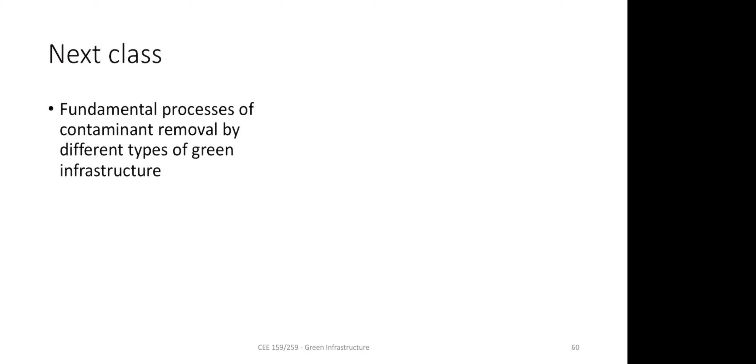Professor Mohanty? Yeah, I wanted to ask, so for the quiz this week, we'll be tested on lecture 3, but would we be tested on doing the mass balance problems? No quantitative problem, it will be only qualitative—like steady state means concentration doesn't change with time, that's the question. No math, because you only have 2 minutes to do it.